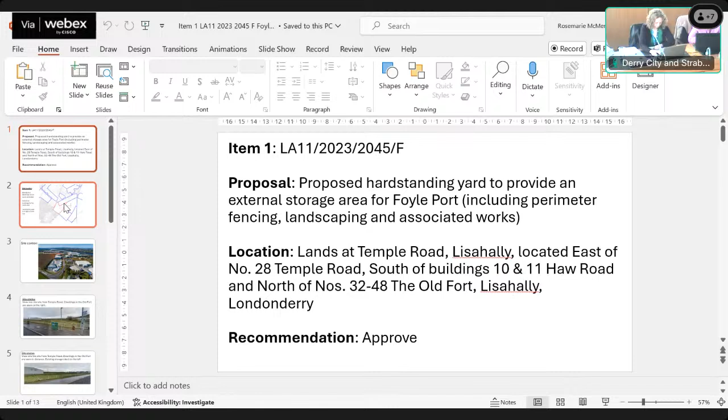Thank you, Chair. Good afternoon, members. Item 1 is LA11/2023/2045F for a proposed hard standing yard to provide external storage for Foyle Port, including perimeter fencing, landscaping and associated works. This is on lands at Temple Road, Lisahally, located east of 28 Temple Road, south of buildings 10 and 11 Haw Road, and north of numbers 32 to 48 the Old Fort, Lisahally, Londonderry. The recommendation is to approve.

The application is before you today as this is a major application and 18 letters of objection have been received. The application was scheduled for presentation in June, members, but was deferred at that meeting for a site inspection by the Planning Committee, and the application has returned to committee today for decision.

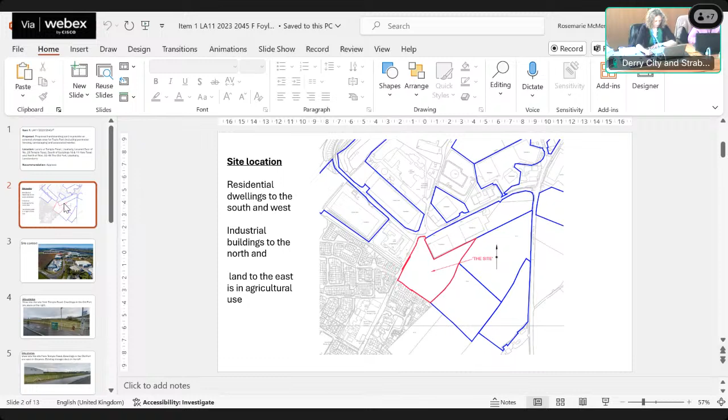This slide just shows the site location, outlined in red. This slide gives an aerial view of the location of the site in the context with the industrial lands and the housing at Strathfoyle.

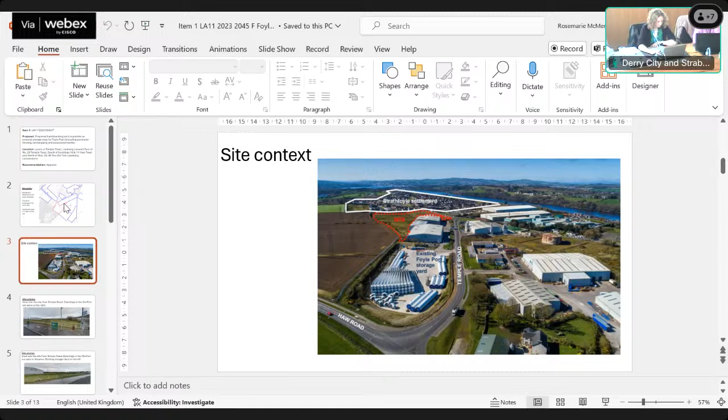The need for the shed, the need for the site storage area, was questioned. There are concerns regarding the impact on health and well-being due to noise, lighting, air pollution, traffic generation, impact on property values, flooding and environmental repercussions, and visual impact. Again, members, these are all detailed in the planning report, and we'll go through some of them today in this presentation. In terms of the material considerations, the following slides summarise the main considerations relating to the development.

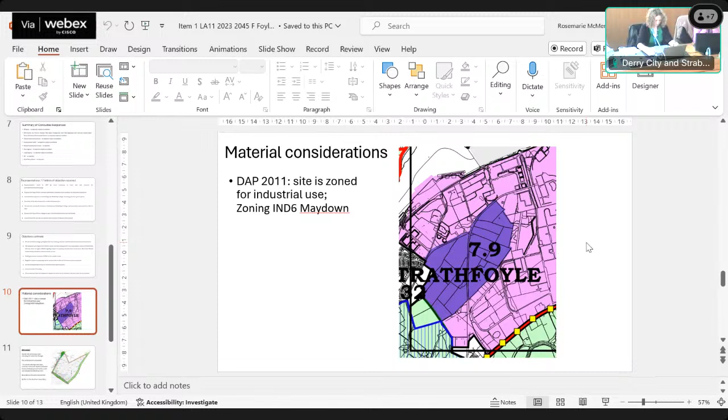In terms of the site layout, the design and layout of the scheme has been determined by the nature of the use. So the site will comprise a large area of hard standing for external storage and distribution, and no buildings are proposed on the site.

The use of the site for storage will maintain the open aspect between the built development at Foyle Port to the north here and the residential development at the Old Fort and Strathfoyle.

It's proposed that the site boundaries will be enclosed by fencing and planted around with native species hedging and trees, and that the planting will assist in mitigating the visual impact of the storage area on Strathfoyle village, and it should also help improve biodiversity.

The next slide just shows the accessible location of the site between Foyle Port and the wider strategic road network for onward distribution from the site.

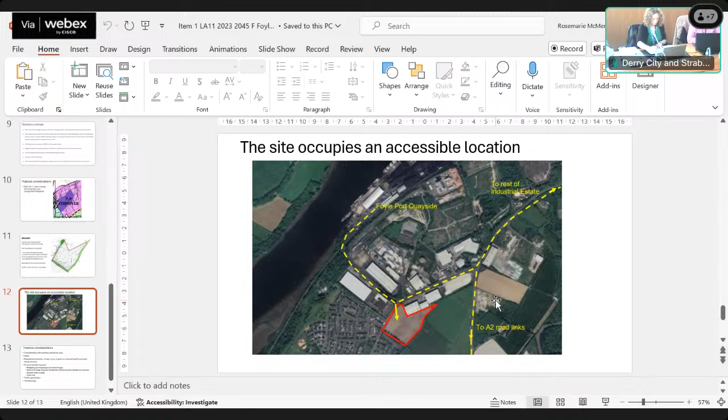In terms of plan and policy considerations, regarding compatibility with existing industrial uses, the development for storage and distribution is itself an industrial use. There'll be no emissions to air or water as a result of the development, so it's not considered that it will have a detrimental impact on the operations of any existing economic developments in the vicinity.

In terms of need, the applicant has set out the case and advises that there's a storage yard to the north of the site which is at approximately 90% capacity. Therefore, additional external storage is required in order to attract large cargo items such as wind turbine components to Foyle Port, and the ability to accept this type of cargo will contribute to the long-term sustainability of the port.

In terms of residential amenity, regarding noise, officers have taken into consideration the neighbours' concerns, the applicant's noise impact assessment and the consultation responses from environmental health. As a result of having to protect the trunk water main, there's an increased distance provided between the operational boundary of the site and the residential dwellings at the Old Fort, and environmental health, who have provided expert assessment in terms of noise, raised no objection.

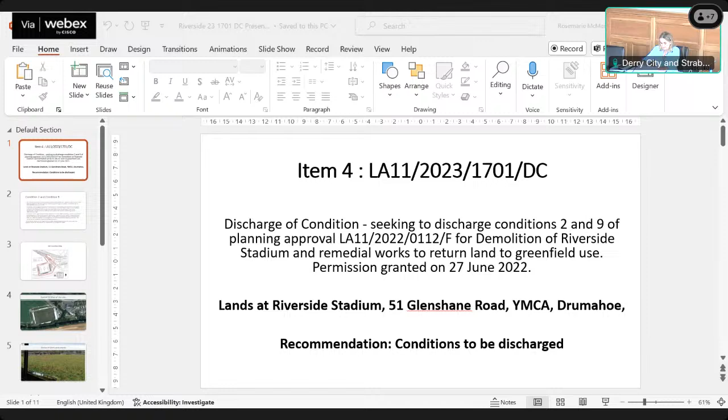Thank you, Chair. Item 4 is LA 11/2023/1701/DC, an application seeking to discharge conditions 2 and 9 of planning approval LA 11/2022/0112/F for demolition of the Riverside Stadium and remedial works to return land to Greenfield use at Riverside Stadium, 51 Glenshane Road, Drumahoe. The recommendation is the conditions be discharged. The application is in front of members today because more than 5 letters of representation were received during processing.

Members, for conditions 2 and 9, an outline Construction Environmental Management Plan, a CEMP, was submitted with the previous full application, which was granted approval subject to conditions by the Planning Committee in June 2022. Condition 2 required submission of a final CEMP to be agreed with the Planning Authority prior to commencement of demolition works, to ensure effective avoidance and mitigation methodologies were planned for protection of the water environment. The reason for condition 2 was to protect the features of the River Faughan and tributaries ASSI and SAC.

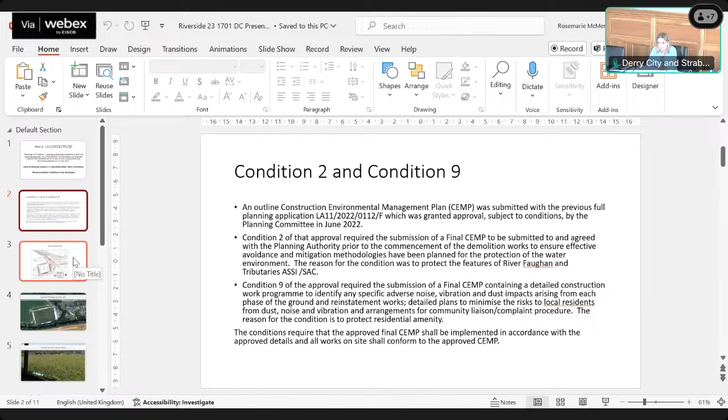Condition 9 required submission of a final CEMP containing a detailed construction work programme to identify any specific adverse noise, vibration and dust impacts arising from each phase of the ground and reinstatement works, detailed plans to minimise risk to local residents from dust, noise and vibration, and arrangements for community liaison and complaints procedure. The reason for this condition is to protect residential amenity. The conditions require that the approved final CEMP be implemented in accordance with the approved details, and all works on site shall conform to the approved final CEMP.

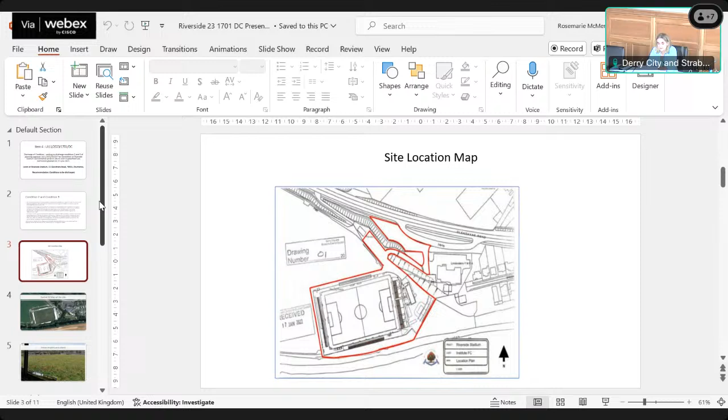Members will also have seen 2 representations received from the Ulster Angling Federation, which have been sent to members as late items. There's also a late item, which is correspondence from the agent, Mr. McIver.

Members, condition 3 of the original planning approval stated that rock hammering shall be restricted to summer months, i.e. between June and September, and during daylight hours. The initial CEMP submitted with this discharge of condition application contained some inaccuracies, and the agent was requested to address the issues; amendments to the CEMP were duly submitted.

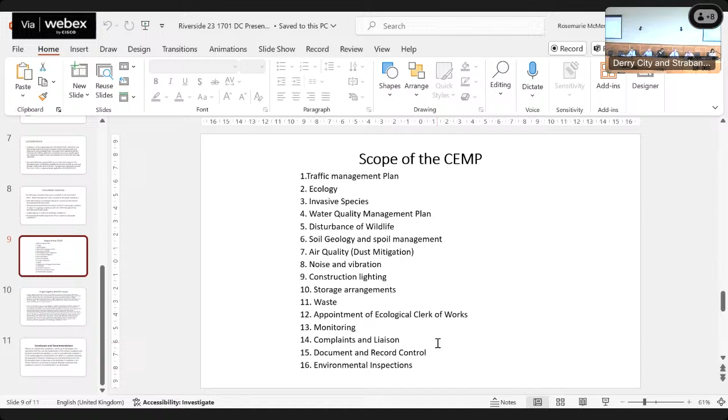Can I just check on members, any dissenting voices? Councillor Carey, I have to abstain as well, Chair, from the start of it. So we have 2 abstentions. Do we take it that everybody else is in favour of the proposal? Yes, thank you.

Thank you very much for that. Members, we're moving on now to item 6, LA 11 bar 2022 bar 0563 bar F, and Laura will be taking us through this one.

Sorry, members, we've got technical difficulties there. Application LA 11 2022 0563 is a full application for the erection of a new wind turbine up to 250 kilowatts with a 59 metre tower and a 54 metre rotor diameter, to replace an existing wind turbine with a 30 metre tower and a 30 metre rotor diameter, which was previously approved under J 2011 0068F. It's located at lands 450 metres south of 28 Aghalougher Road, Castlederg, and the recommendation is to approve. This application is before members today as there were more than 5 objections received, and the application was also referred.

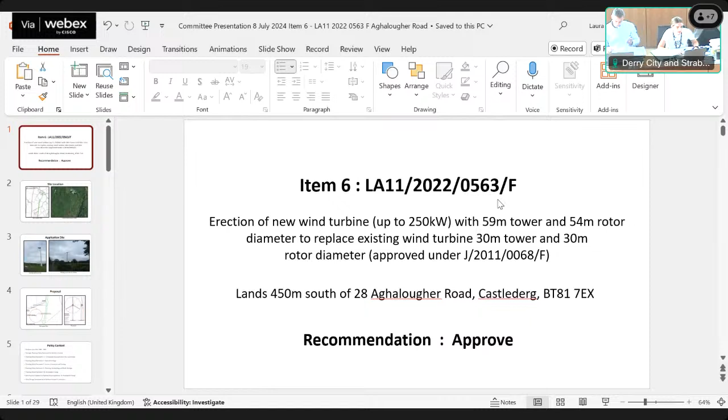In terms of the application site, as shown on the site location plan and aerial image, the site is a circular portion of land outlined in red within a larger agricultural field, and it contains an existing operational 2-blade wind turbine. It's accessed via an existing access lane through the farmyard at 28 Aghalougher Road, just north of the application site. It's set about 500 metres south of Aghalougher Road and 400 metres west of Minamullen Road, and it's located in the rural area approximately 1.3 kilometres southwest of Killeter.

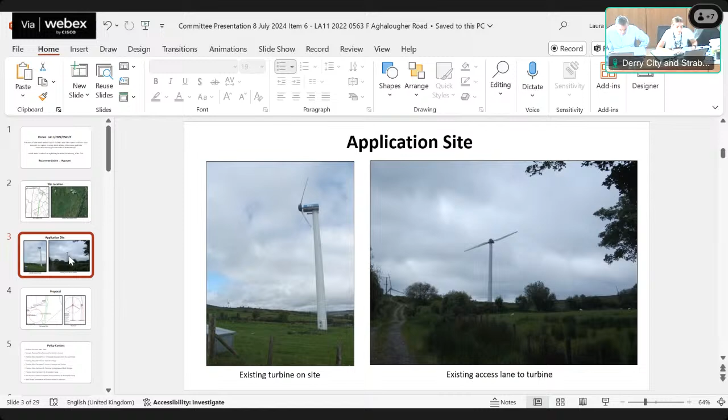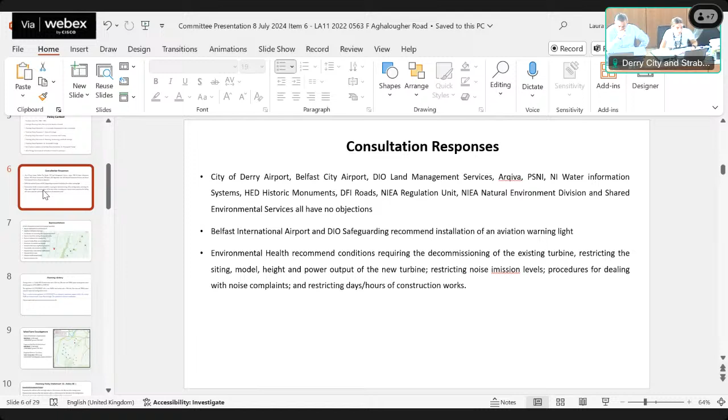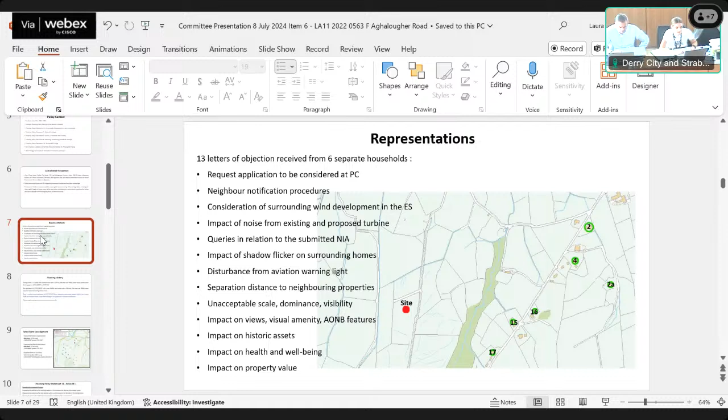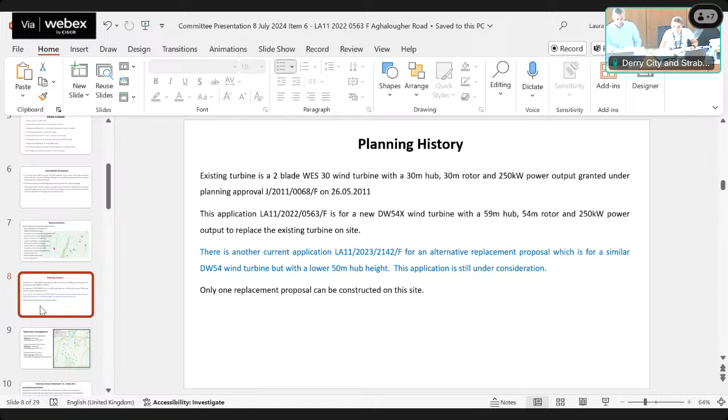This drawing, which is also included in the planning report, identifies the different wind energy development within the immediate area. There are 3 small domestic micro wind turbines identified there in green. Then we have the wind farms of Seagronan and Church Hill, which are located south of the application site. Also, construction has commenced to extend Seagronan wind farm with an additional 3 turbines, highlighted there in yellow.

As I pointed out, the main policy for considering this planning application is under PPS 18. In terms of visual amenity and landscape character, the proposed turbine has a 59-meter hub height, which is a 29-meter increase on the existing turbine. It will have a 54-meter rotor diameter, a 24-meter increase on the existing rotor diameter, increasing the height from the blade tip from 45 meters to 86 meters as now proposed.

This drawing also indicates the location from where all the viewpoints were considered in terms of this planning application. Just to point out, in case members picked it up in the report, Visual 8's location point was omitted from the drawing. So I've added it onto this drawing here going forward.

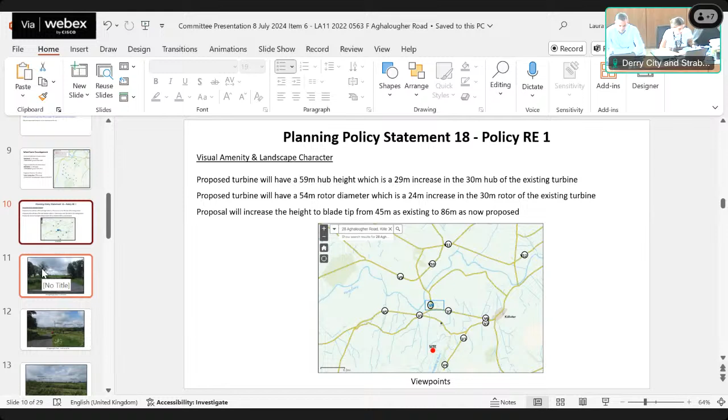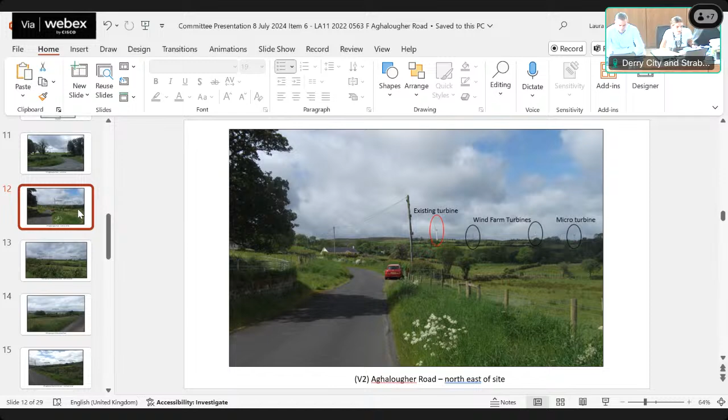The turbine on the application site, the existing one and the proposed, will be intervisible with the wind farms to the south and southwest, and also with the micro turbines located north of the site. This is seen in the visuals, which I'll flick through here. These are all within the planning report too. You can see highlighted in red, that's the existing turbine, with any other turbines also highlighted for you.

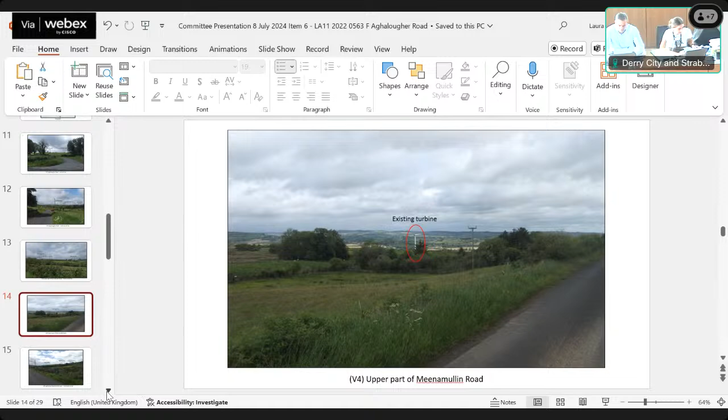The proposed turbine will be visible at both long and short range views along the local rural road network. Here are some visuals along these roads. This is Meenamullin Road, and again Meenamullin Road showing a different view. Obviously these show the existing turbine, but the proposed turbine will be in the exact same position.

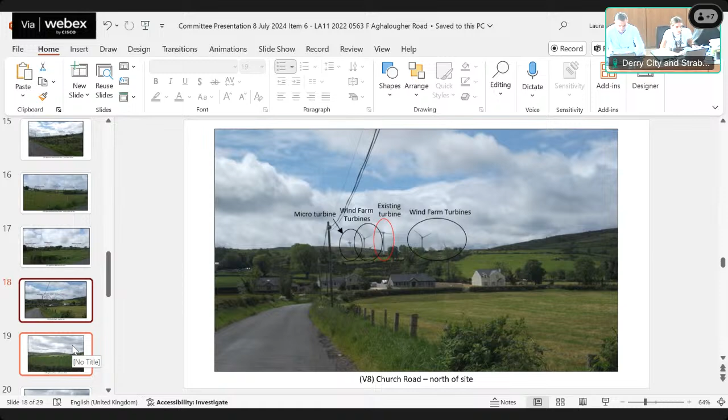From Church Road, you can see the existing turbine and some of the turbines from the wind farm, as well as those other micro turbines. This is a longer range view from Park Road, north of the site, where you can see more of the turbines associated with the wind farms. And again, this is another longer range view.

Overall, in terms of visual amenity and landscape character, officers have considered the proposal and concluded that the increase in scale of the turbine wouldn't have an unacceptable adverse impact on the visual amenity or landscape character of the surrounding area. The replacement turbine will be viewed in the context of the surrounding wind energy development and won't appear disproportionate in scale to other wind turbines in the locality. The replacement proposal will not have a greater cumulative visual impact with the surrounding developments, given it's replacing the existing turbine. Overall, it's considered that the proposal complies with policy RE1 of PPS 18 with regards to visual amenity and landscape character.

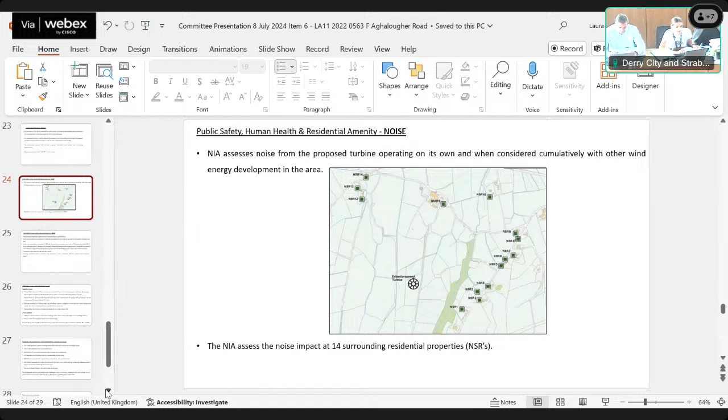Policy RE1 also requires that we assess the proposal in terms of noise, which is also considered under the SPPS. A noise impact assessment was received, with a number of revisions made to it. It concluded that the noise from the proposed turbine on its own, when considered cumulatively with the existing wind energy development, was assessed at 14 surrounding residential properties. This is all considered in detail in the planning report. The map there just indicates the noise-sensitive receptors, the properties which were considered under the noise report.

So environmental health have considered all the information submitted in terms of noise with the planning application. They've concluded that there are no predicted exceedances at daytime or nighttime noise limits for any of the NSRs for the turbine operating.

They've also concluded that there's one minor exceedance at number 17 Meenamullin Road. However, this property is financially involved with the wind farm, and as a result is afforded a higher financially involved noise limit, which wouldn't be exceeded. The cumulative noise limits are met at all the other noise sensitive receptors.

In terms of control on this, conditions will be included should approval be granted to ensure that the proposal complies with the predicted noise levels as set out in the noise assessment. Therefore, in consideration of noise, officers are content, given the information submitted, that there won't be an adverse impact.

The proposal is also considered in terms of shadow flicker, and an assessment is provided in that respect. There will be shadow flicker at certain properties, and there are 6 properties within the potential affected area.

As you can see from the planning report, summarised, it will be exceeded by the 30-minute per day limit by 2 minutes at 15 Meenamullin Road, and their shadow flicker at 17 Meenamullin Road will exceed the recommended 30-minute per day limit by 8 minutes, and the 30 hours per year limit by 17 hours.

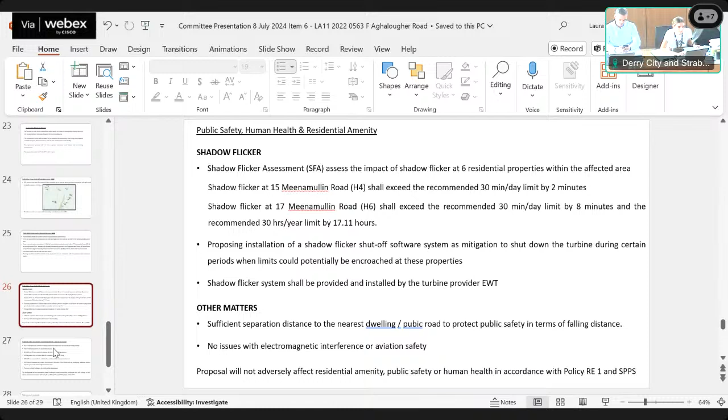In terms of biodiversity, the site's within grassland, contains an existing turbine and access by an existing laneway. There's a 50-metre separation distance to the nearest watercourse. NIEA and SES have been consulted and are content with the NIEA regulation unit. HED have also been consulted due to a historic monument, but they're content that there won't be any additional adverse impact, and there are no listed buildings within the vicinity of the development.

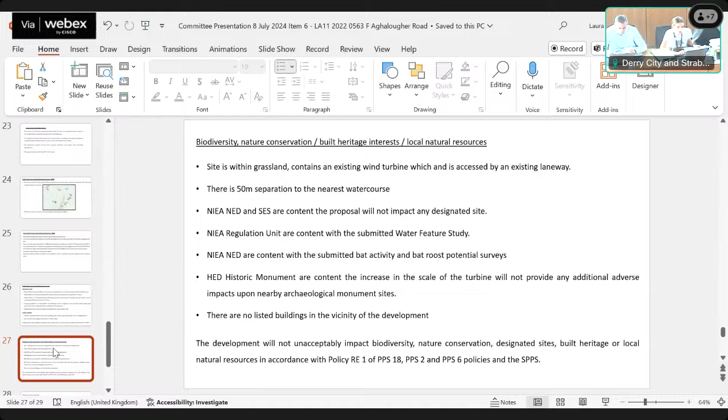So therefore, in terms of policy RE1, PPS 2 and PPS 6 and the SPPS, officers are content in that respect.

The proposal uses the existing access lane off Aghalougher Road, and it won't lead to any intensification of the existing access. DFI Roads have no objection. Therefore, the proposal is considered to comply with policy RE1 and PPS 3.

So just to summarise, it's considered that the increase in scale of the replacement turbine won't have an unacceptable adverse impact on the visual amenity or the landscape character of this area. It won't adversely affect the amenity of surrounding properties in terms of noise. Mitigation has been proposed to protect the amenity of nearby residents in terms of shadow, flicker and noise. And the development will not have an adverse impact on any biodiversity or nature conservation interests.

Overall approval is recommended for the conditions which are set out in the planning report. Thank you.

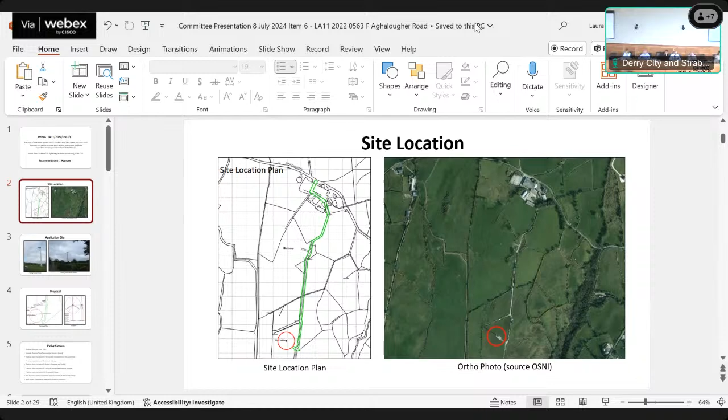So I take it then that everybody else is in agreement to overturn the officer's recommendation. Thank you.

Okay, then we're moving on to application number 8. This is a proposed single glamping pod at Strahalter Road, Newtownstewart. Laura's taken us through this one. Thank you, Laura.

Application LA11 2023/1863 is a full application for a single glamping pod located at 5 Strahalter Road, Newtownstewart, and the recommendation is to refuse.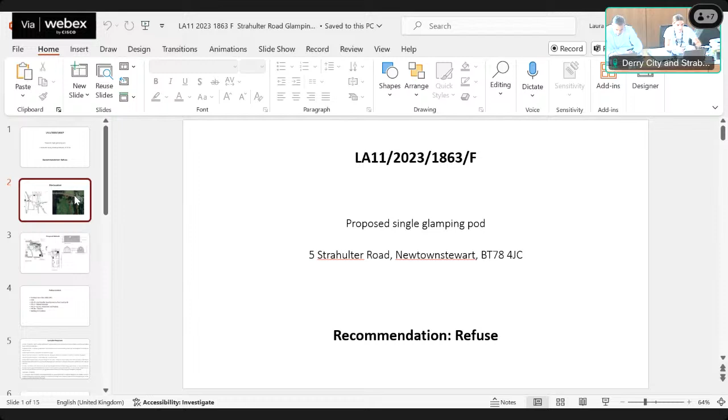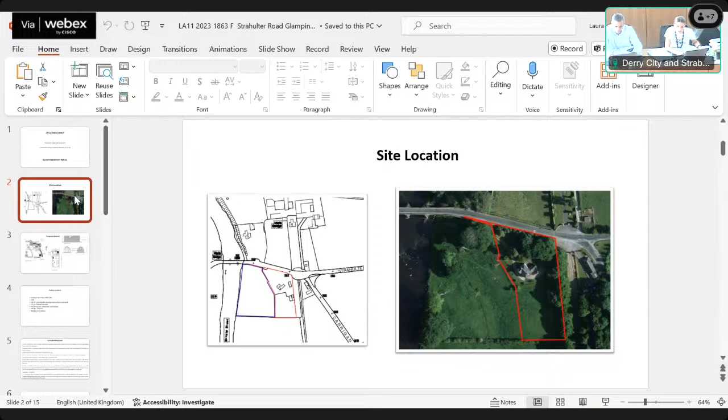This is the site location plan and aerial image of the site. The application site comprises the residential curtilage of number 5 Strahulter Road and the southeastern corner of an adjoining agricultural field. It's located on the southern side of Strahulter Road and to the east of the Strule River. The boundaries are defined by a mix of fence and hedging, with the western boundary undefined. The land within the site is predominantly level, but the remainder of the field slopes away to the west towards the river. The southern part of the site, comprising the agricultural land, is within the historic garden of Moyle House, the house itself being 140 metres south of the site. Moyle Bridge is also located to the west of the access.

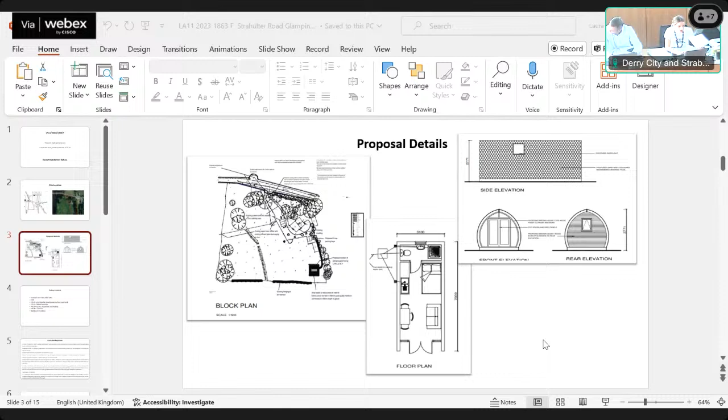Primarily, in order to establish the principle of this proposal, it's assessed under PPS 21, which directs you then to PPS 16, which is tourism. Policy TSM5 is the most relevant policy to assess a proposal of this nature, where planning approval can be granted in one of three cases. In terms of Part A, it's required to be located within the grounds of an existing approved hotel or self-catering complex, guest house or holiday park. Clearly this application is not located in any of those. It's within the domestic curtilage of an existing single dwelling, so therefore it doesn't meet criteria A.

In terms of criteria B, it allows for a cluster of 3 or more units provided at or close to an existing approved tourist amenity that is, or will be, a significant visitor attraction in its own right. This proposal is for one single glamping pod that can sleep a maximum of 2 people, just outside the curtilage of a domestic dwelling. So it's not a cluster of 3 or more units, and it's not close to an existing or approved tourist amenity that's a significant visitor attraction. The agent has submitted a supporting statement in an effort to prove compliance with that criteria, but officers have considered this, and it lists a number of local attractions in the general locality of the site. Therefore, the proposal doesn't meet criteria B either.

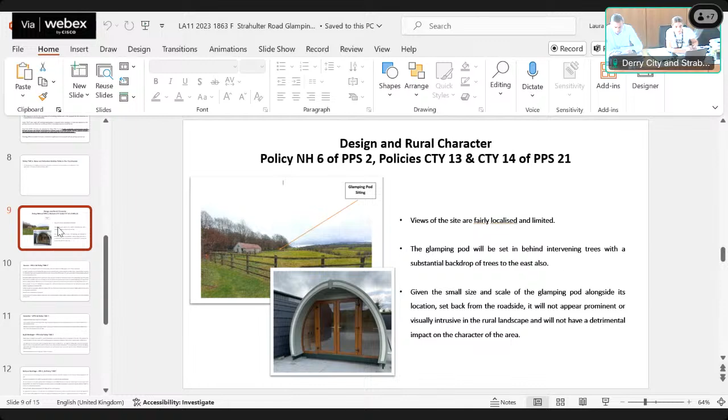Views of the site are localised and limited. It will be set behind intervening trees, and given its small scale and the location set back from the road, it won't appear as a prominent feature on the landscape, and therefore will comply with the above policies.

In terms of access, it's proposed to use the existing access for the dwelling. Following the submission of additional information and consideration of the proposed usage of the glamping pod, officers are content that the visibility splays can be provided to an appropriate standard, and sufficient parking can be provided within the site. DFI Roads have no objections, so therefore the proposal complies with PPS 3 and policy TSM 7 in that respect.

In terms of amenity, Environmental Health have no objections. There's sufficient separation distance between the pod and the residential dwelling, which would reduce any potential impacts in terms of amenity. So therefore the proposal complies with the SPPS and policy TSM 7 in that respect.

In terms of nearby built heritage features, again we've consulted with HED, who have no objection to the proposal, given the scale of the proposal and the separation distance, and historic monuments have no objection. Therefore, the proposal complies with PPS 6 and TSM 7.

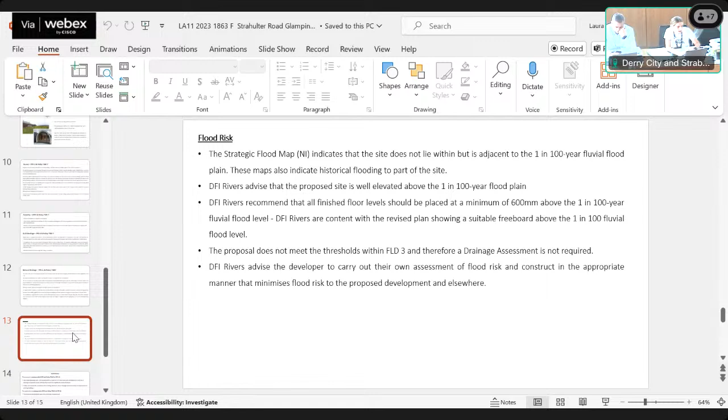Just to summarise, in terms of the principle of this development, the proposal is contrary to the SPPS and policy TSM 5 of PPS 16. This is a single glamping pod. It's not located within a cluster of 3 or more units close to an existing or approved tourist amenity that will be a significant visitor attraction. It doesn't involve the restoration of an existing clachan or close. It's also contrary to policy TSM 6 of PPS 16 in that the proposed development doesn't constitute a holiday park.

And it's also contrary to the SPPS and policy CTY 1 of PPS 21 in that it doesn't meet any of the cases in which non-residential development would be permitted in the countryside. And therefore refusal is recommended for the reasons set out in the planning report.

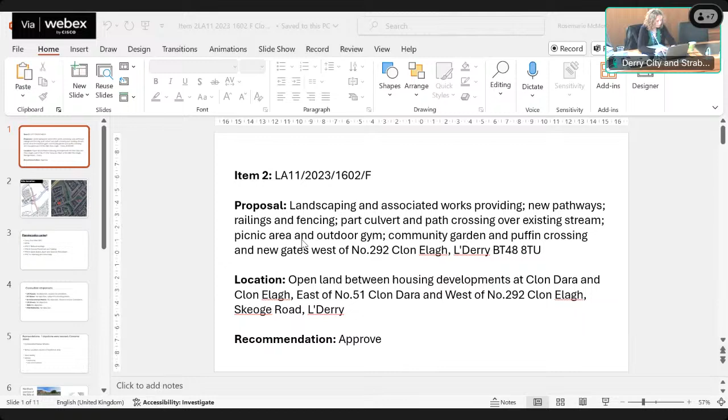I'll just go to the site location map. It's on lands between the housing developments at Clon Dara and Clon Elagh, east of number 51 Clon Dara and west of 292 Clon Elagh. The recommendation is to approve, and the application is before you today as there are more than 5 objections.

So the plan and policy context is set out in the planning report before you, along with the consultation responses and summary. There are no objections from DFI Roads, NI Water, Environmental Health, DFI Rivers, SES and NIE.

We've had 7 representations, and the concerns raised, in summary, are antisocial behaviour and noise, the need and location for the proposed development, road safety, and other concerns regarding dog fouling and a lack of consultation.

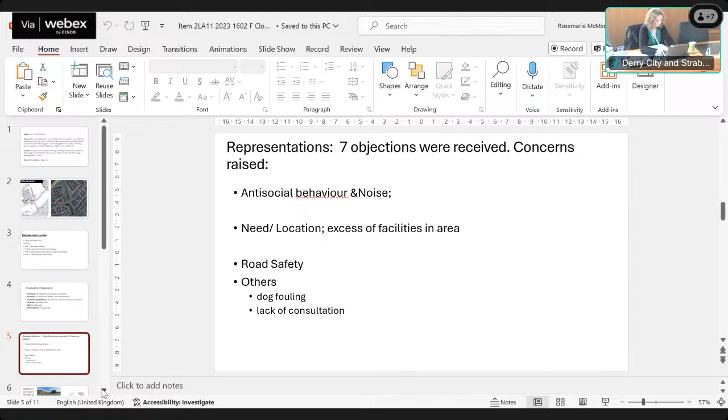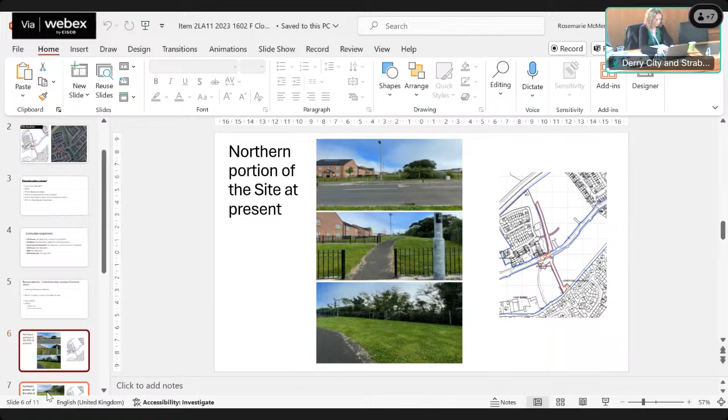These slides just show the location of the development and the site at present. This is in the northern section of the site, just off the main thoroughfare, and the lands further to the north of the site, and then lands to the south of the site.

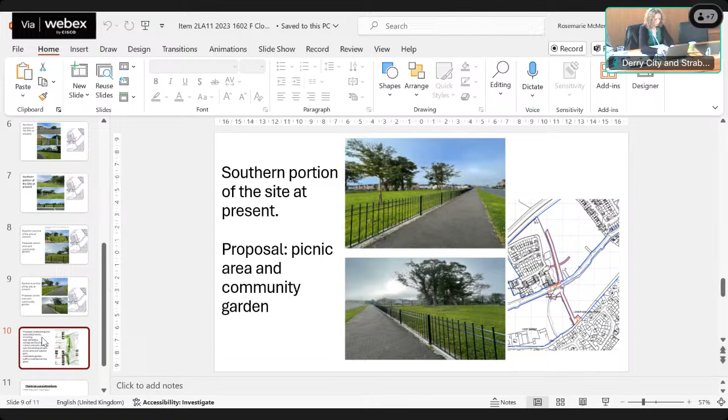So the landscaping plan shows all the works proposed to be undertaken, as just described, in terms of new pathways, railings and fencing. There's a culvert proposed in a central section of the site over an existing stream, which will allow a path to be provided linking the housing developments with the existing play park. There's a picnic area and community garden provided in the southern section of the site, and the puffin crossing is on the main road that will allow it all to be linked up and allow safe crossing.

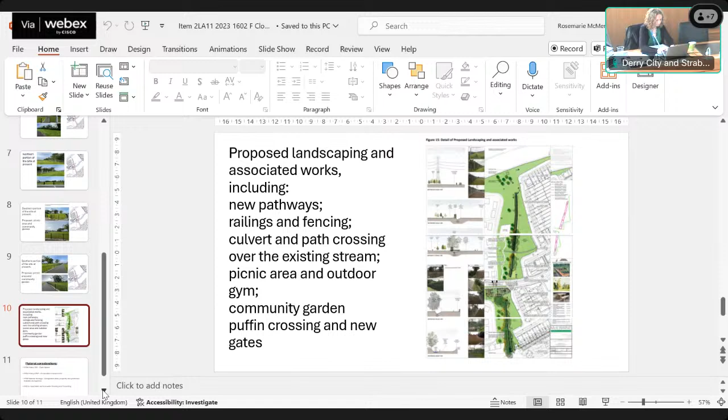So the material considerations are in respect of open space under policy OS1 of PPS 8, and this policy operates a presumption against the loss of existing open space. As the site comprises open space at present, the facilities proposed will enhance the use of the area and will bring substantial community benefits.

Officers consider that the proposal complies with policy OS1 of PPS 8. PPS 3 has policy AMP1 in terms of accessible environments. At present, the northern and southern sections of the existing open space are separated by the main thoroughfare, and a puffin crossing is proposed to provide safe access, with new pedestrian accesses proposed throughout the space.

So DFI Roads have no objection, and officers consider that policy AMP1 is complied with. In respect of impacts on natural heritage, Shared Environmental Services advise the proposal would not be likely to have a significant effect on any European site. In terms of habitat, species and natural heritage, mature trees within the site will be retained and new planting undertaken.

In terms of flood risk and surface water flooding, the new hard surfaced areas within the picnic area and community garden will be constructed using porous surfacing to allow natural infiltration of rainwater. Path surfaces will be graded to allow runoff to the grass areas either side, so surface water flooding is unlikely.

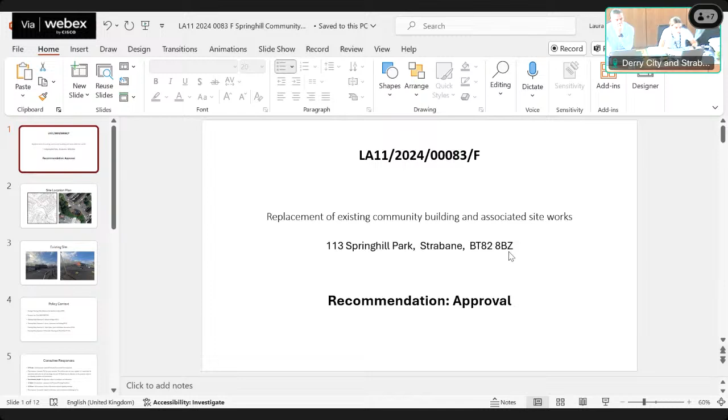Application LA11 2024-0083F is a full application for the replacement of an existing community building with associated site works at 113 Springhill Park, Strabane, and the recommendation is to approve.

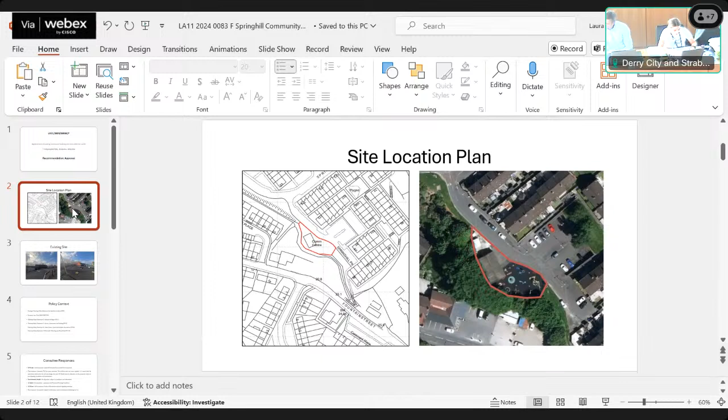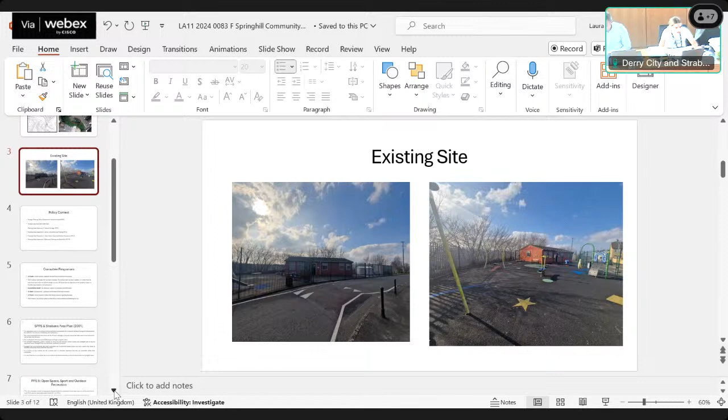It's located on white land as defined in the Strabane area plan, and it's located within an established housing development. These are some images of the existing building on the application site, and you can see the play park there too. In terms of the policy context, this application is assessed under the SPPS, the Strabane Area Plan, PPS 2, 3, 8 and PPS 15.

There have been a number of consultations taking place in this application following some amendments and additional information. None of the consultees have any objections to the proposal and have provided conditions and advice.

In terms of the principle of this proposal, this is an existing community facility located within a residential development. It's considered to fall under Class D1 community uses. The agent has submitted supporting information which details that the porta cabin has been on site for 26 years, with approximately 300 people using the site and the centre on a weekly basis.

The centre is owned by the council and managed and run by a registered charity. It also has a youth association, a community-based project to address the needs of young people in the local area. It's a centre run by the residents for the local people.

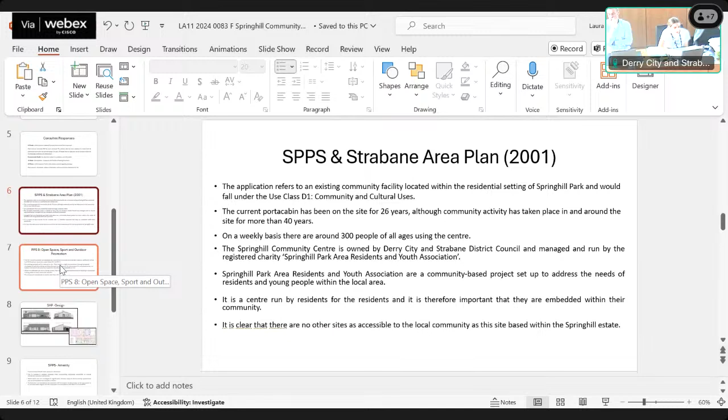It's clear that there aren't any other sites accessible to the local community, as the site is based within the Springhill Estate. In terms of location and the need for the community centre at this location, officers are content that it complies with the Strabane Area Plan and the SPPS, and would be acceptable in principle. This was also considered under PPS 8, given there's a play park within the site. However, as detailed in the plans, this will be retained in situ. There'll be a slight encroachment onto it, but it won't be significant, and therefore we consider the proposal complies with policy OS1 of PPS 8.

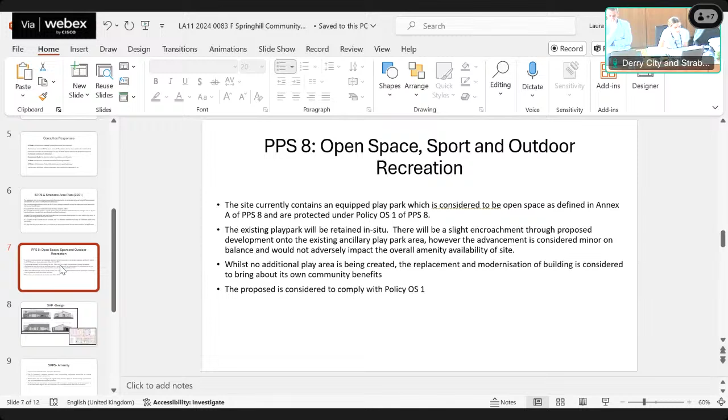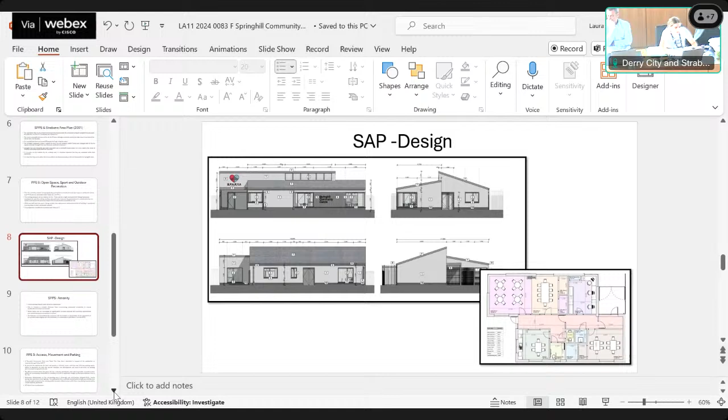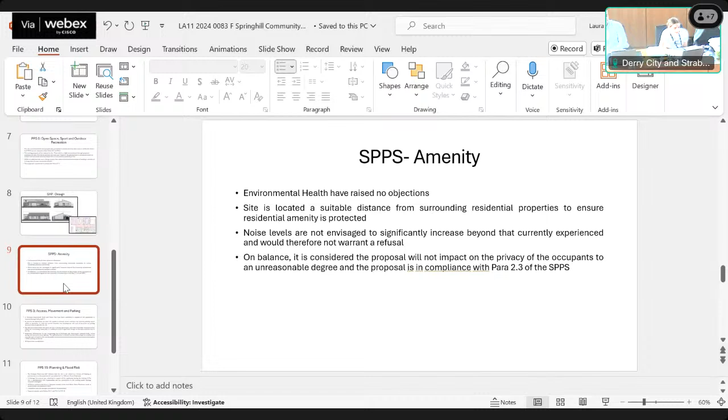In terms of amenity, environmental health have been consulted and haven't raised any objections. It's considered that the proposed building is located a suitable distance from any surrounding residential properties, so there'll be no adverse impacts to the amenity of any of those dwellings, and noise isn't likely to increase beyond what is currently experienced at the centre, therefore complying with the SPPS.

In terms of PPS 3, access and parking - the site doesn't provide a vehicular access and doesn't hold any current parking spaces, but officers are content, given the use of the site, that there's sufficient parking within the area, and most people will attend the site from the local area, likely on foot. DFI Roads have considered the proposal and don't have any objections to it.

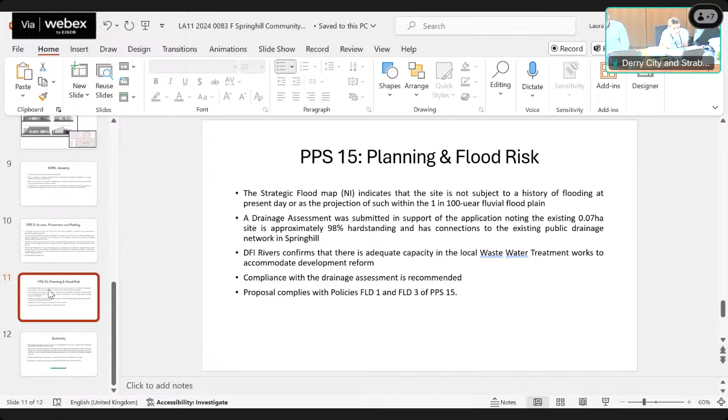In terms of PPS 15, a drainage assessment was submitted. DFI Rivers have considered this and don't have any objections to the proposal, provided the drainage assessment is complied with. Therefore the proposal complies with PPS 15.

To summarise, the development proposes to remove the existing buildings on the site and replace them with a new building of modern design. The site has been used by the community since the 1980s, and is well established within the heart of the community. The regeneration design scheme provides enhancement of the site for its use, and therefore the proposal complies with the SPPS, the Strabane Area Plan, PPS 8, PPS 2, PPS 3 and PPS 15, and approval is recommended subject to the conditions set out in the planning report. Thank you.

Thank you, Chair. Good afternoon, members. LA 11 2023 1778F is a full application for the provision of a new surface level car park of 93 spaces with a 1.1 metre high paladin perimeter fence and amenity lighting for Leafair Community Centre and playing fields. The development includes a new vehicular access on Lenamore Road, Lenamore Road, Derry with the automatic barrier signage, and a new ramped access and steps to the community centre. The application site, as outlined, is land approximately 18 metres northeast of Leafair Community Centre, 20A Leafair Park, Derry, and the recommendation is to approve.

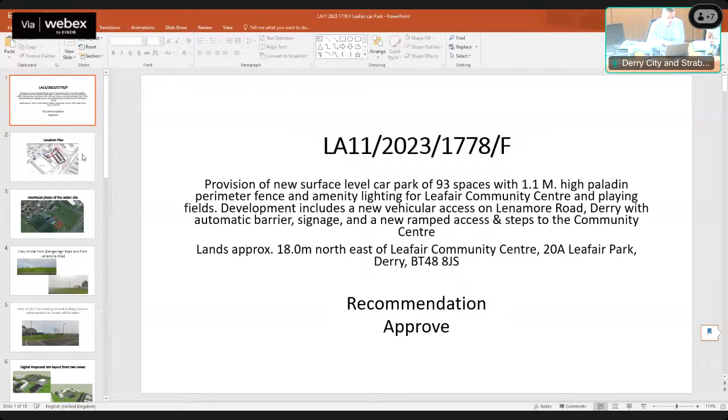The application is before members today as the applicant is Derry City and Strabane Council. The application site outlined in red is an existing area of green open space located to the northeast of Leafair Community Centre.

Proposed access off the existing Lenamore Road, which leads into Leafair Park. At present, there are no perimeter fences. It's essentially a green grassed area, and it can be viewed also from the Glengalliagh Road.

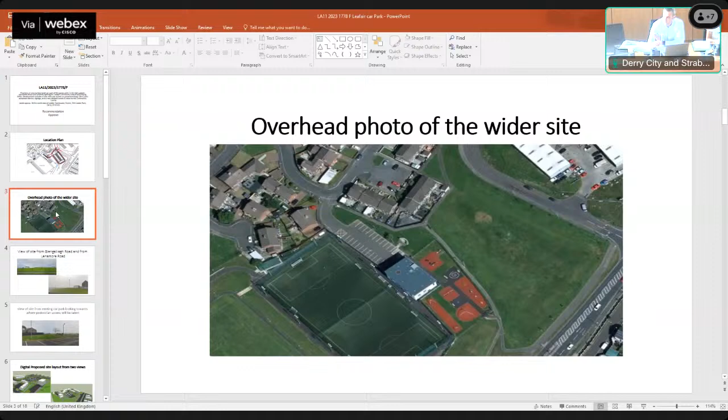To give an idea of the context of the site, you have the Leafair Community Centre, which lies to the southwest of the site, including an existing small car park, a two-storey community centre building, a formal play park, 3G pitches, as well as a grass pitch. The need for the application relates to the success of the existing facilities and the requirement to provide additional parking for Leafair Community Centre and the associated sporting fields and park.

So this is a view of the site from the Glengalliagh Road at the top, and the other is from the Lenamore Road, looking back up towards the site. The site is in a raised, elevated green open field space beside Leafair Park. This is a view back from the community centre car park towards the site.

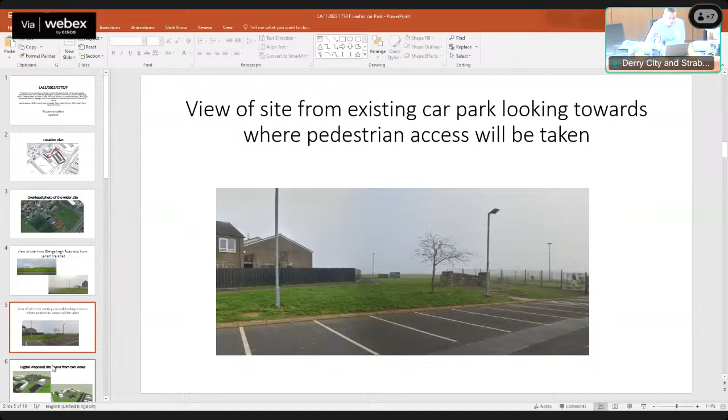This is the existing car park at Leafair Community Centre. We've also been provided with digital images of the application proposal and the proposed layout of the car park and its approximate location to the existing properties in the area.

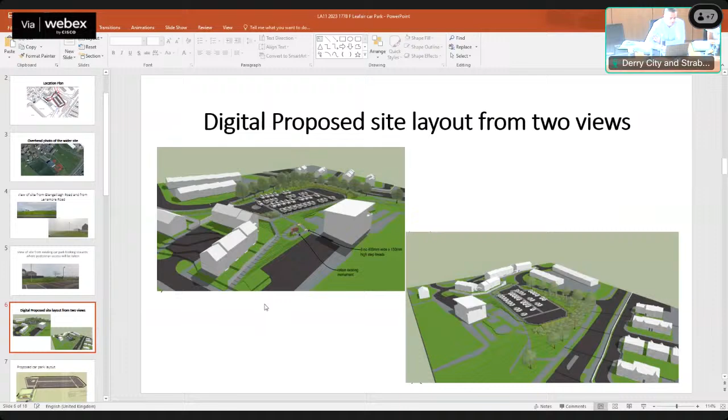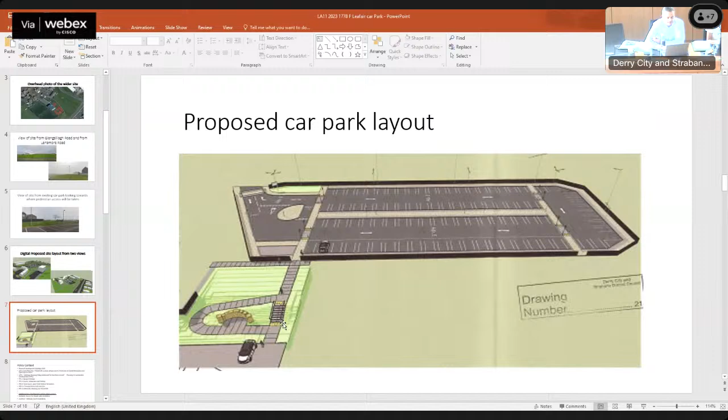Here's a detailed drawing of the actual layout of the car park. The access up here is the Lenamore Road, and what you see at the bottom left-hand corner is a new path and steps with the existing monument leading on to the existing car park at Leafair.

The policy context is set out within the case officer report. The main considerations are the Derry Area Plan, the SPPS and PPS 8, as well as the other ones listed in the application report. We consulted a number of bodies in relation to the application.

There have been no objections. The responses are outlined in the report. We received a number of reports in support of the application, which have been considered by the relevant consultees, and again there's no objections subject to standard conditions.

We've had one letter of representation from a local resident raising a number of issues in relation to the loss of the open space, the visual impact of the proposed car park, congestion currently presenting itself at the site, suggestion of alternative sites for the car park, and concerns about antisocial behaviour in relation to the proposed steps. The officers have considered each of these points and have outlined our consideration of those and how we weigh them up in the report.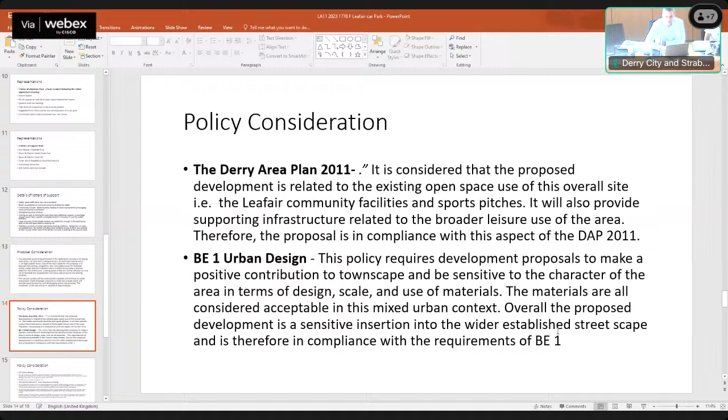We've also received a drainage assessment, which we consulted Rivers Agency on, and they're content with that. The Derry Area Plan is relevant in a number of areas, including BE1 urban design. We're content, given the urban context of the site, that in terms of character and design, the proposal is acceptable.

There is no concern in relation to PPS2. PPS3 roads, and DFI Roads, have considered the application and are content, and they've also considered the non-motorised users, and again they're content with the proposal in that respect.

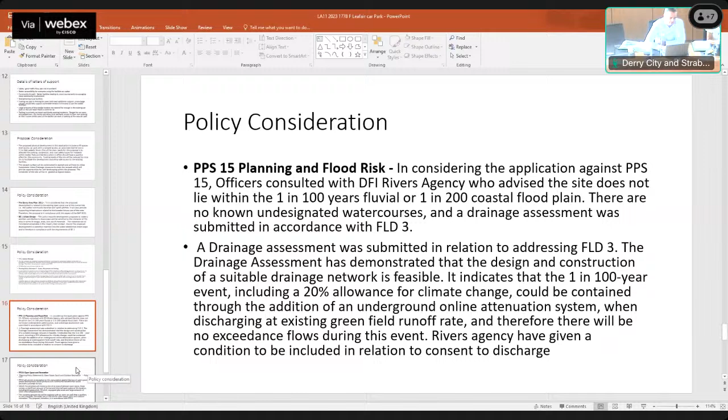As I say, the drainage assessment has been considered by Rivers Agency. We have no issues with that. I suppose the main policy consideration from a planning perspective is the loss of the open space.

PPS 8 is the retained planning policy which deals with the loss of open space, and there is a presumption against loss of open space unless an exception is met. That exception is where development would produce such community benefits that would decisively outweigh its loss. Considering this, officers took into account the letters of support from local youth and sporting organisations.

We've also taken into account the planning gain related to the issues that will be addressed if approved. So whilst there will be a loss of open space, we think this meets the exception criteria, and there will be significant community benefits if approved.

So overall, having considered all the above, the consultee responses, and third-party representations both for and against the application, officers recommend approval subject to the conditions set out in the report. Thank you, Chair. Thank you, Malachy.

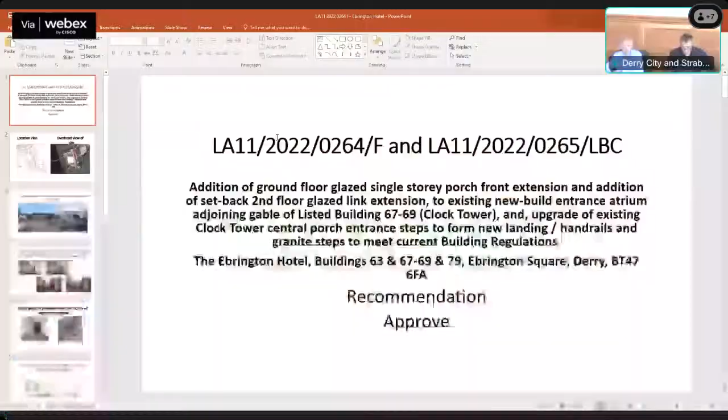Thank you, Chair. LA 11 2022 0264 and LA 11 2022 0265. It's a full, sorry, it's 2024 - actually I'm sorry, it's a typo on each of those. It's 2024 for each of those applications.

This is a full and a Listed Building application. It relates to an addition of a ground floor glazed single-storey porch front extension, an addition of a setback second floor glazed link extension to the existing new build entrance atrium adjoining the Listed Building at 67-69 Ebrington, known as the Clock Tower, and an upgrade of the existing Clock Tower central porch entrance steps to form a new landing, handrails, and granite steps to meet building regulations. The site is the Ebrington Hotel, formerly known as Baldwin's, 63, 67, 69 and 79 Ebrington Square, Derry. Our recommendation is to approve the full application and to approve consent for the Listed Building application.

So the application site is the recently constructed Ebrington Hotel, which is located in Ebrington Square. You'll be familiar with the application site. The actual proposal for the full application was before members and approved by members.

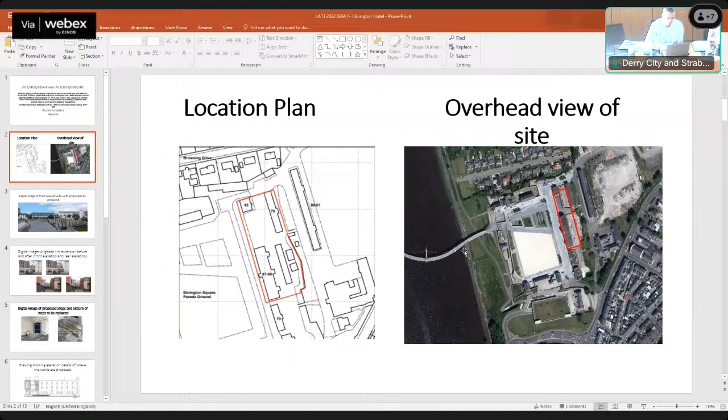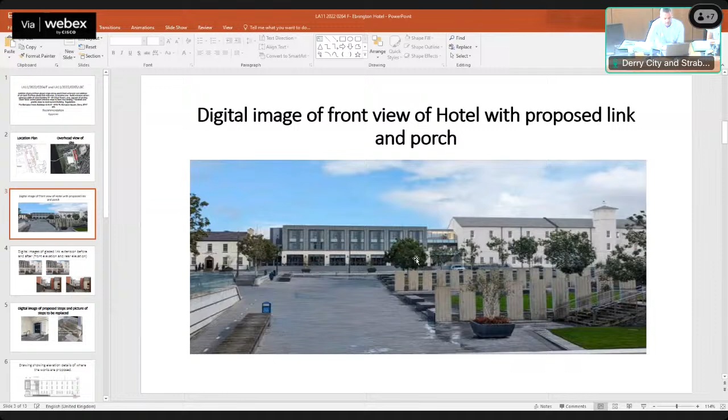So you'll be familiar with the walk up from the Peace Bridge to the existing modern extension - this is a digital image. There's a number of minor alterations to the existing hotel, mainly in the form of an addition of a second floor glass link between the modern element of the hotel and the Clock Tower building, and there's also some improvements to the porch, I suppose, and then steps at the Clock Tower as well.

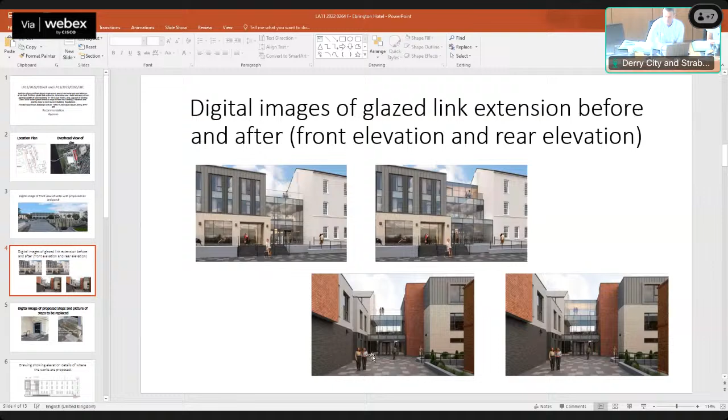The agent has provided some digital images of before and after, which I think are helpful, showing now and as proposed, from the square and the parade ground looking towards the site, and to the rear entirely within the courtyard of the hotel. They've also provided digital images of the new steps, showing what's existing there. These are just to bring it up to modern building regulation standards. Here's the drawing provided by the architect also.

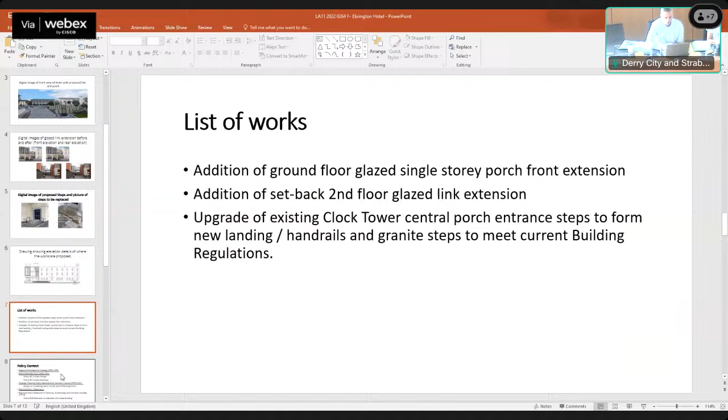So look, I've covered the list of works here - they're just outlined again in the slide. The policy context is set out in the RDS, the area plan, the SPPS, and given the location and context of the site, PPS 6, because we're dealing with an extension and alteration to a Listed Building. We're also dealing with an application site which is within a scheduled monument, i.e. the Star Fort at Ebrington.

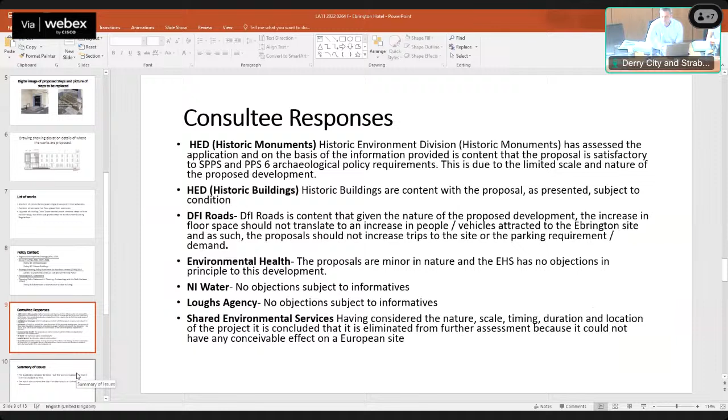So we've consulted a number of bodies, both on the full and the Listed Building consent application. In terms of the full application, we consulted Monuments, DFI Roads, Environmental Health, NI Water, Loughs Agency, and Shared Environmental Services, and as you'll note from the report, there's no issues whatsoever. In terms of the Listed Building consent, we've also consulted Historic Buildings, and again they're content with the proposal subject to one condition set out in the Listed Building consent report, which relates to the provision of final details of the steps.

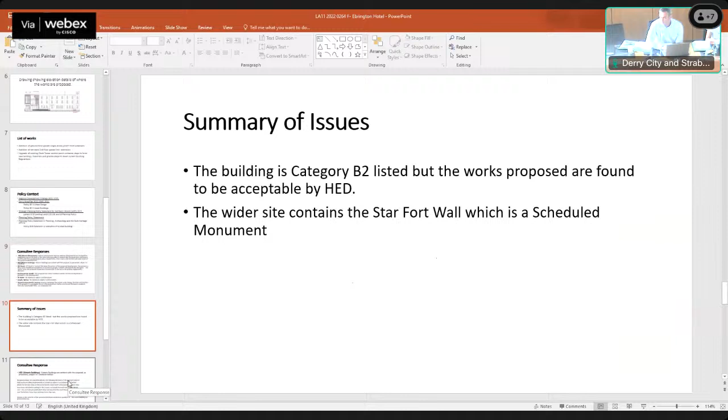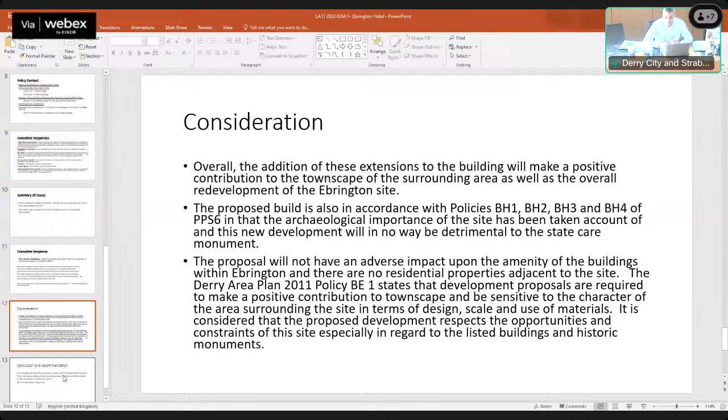Yeah, it's a category B2 Listed Building. No issues from HED in relation to that or the Star Fort wall. That's just the details of the proposed condition, which is fairly standard and accepted by officers. So in summary, officers believe this is a fairly minor alteration to an existing property which will make a positive contribution to what's already there, and it's been accepted by the relevant statutory consultees. As such, officers recommend approval for the full application and that consent is granted for the Listed Building consent. Thank you, Chair.

Thanks for that, Malachy. Any questions for Malachy? Okay members, we'll go to number 11 first, the LA11 2022 0264. Oh, Christopher, apologies. Chair, I have no questions. So if you wanted to continue on with...

I suppose if you're asking for a proposal for item 11 in particular, I'm more than happy to propose that we accept the officer's recommendation. The works carried out at this particular building have proved to be a massive improvement to what was there previously. It's a high quality asset in the heart of our city centre, and the proposed works are minor in nature, but they will be an improvement to what's there already. So on that basis, I'm happy to propose that we accept the officer's recommendation for item 11.